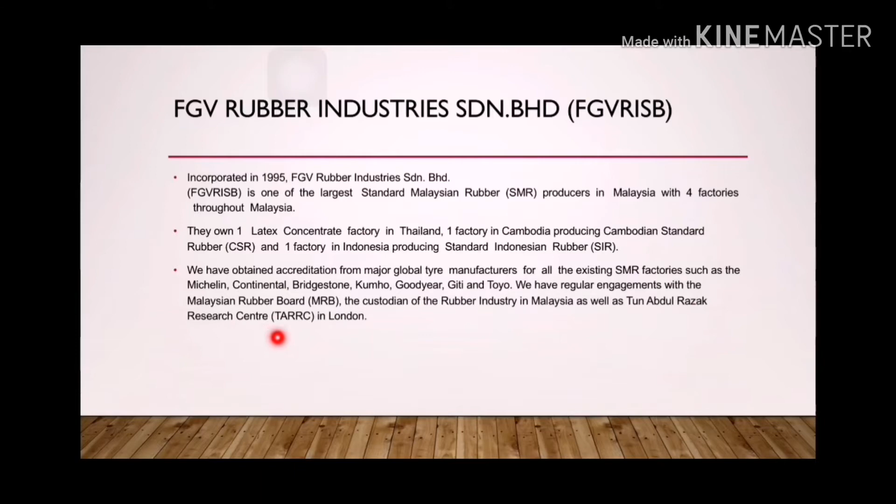Assalamualaikum, and today I will discuss the process involved for SMR10. There are 5 processes that involve making SMR10. The first one is raw materials, the second one is processing, the third one is drying, the fourth is baling, and the last one is packing.

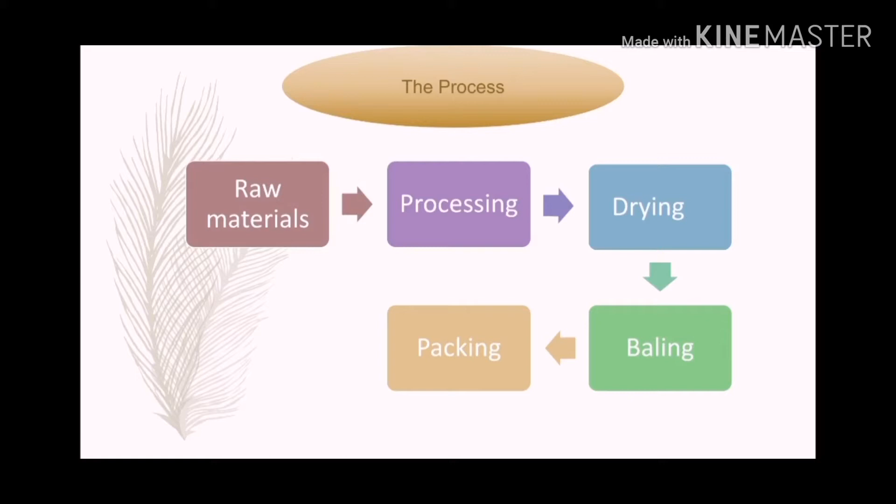For the raw materials used in this process, mainly used are cup lumps and unsmoked rubber sheet. There are two raw materials that are mainly used for this process.

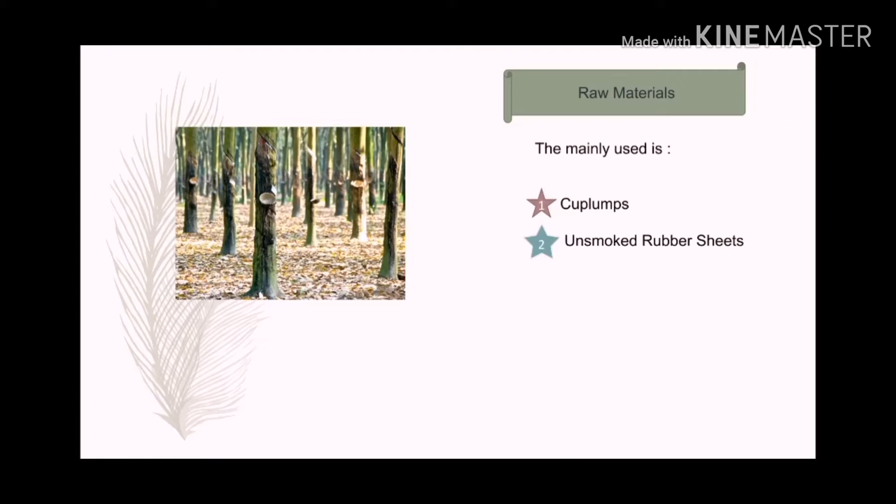For the processing process, they are separated into three stages, where the first one is pre-cleaning, the second one is creping, and the last one is final size reduction.

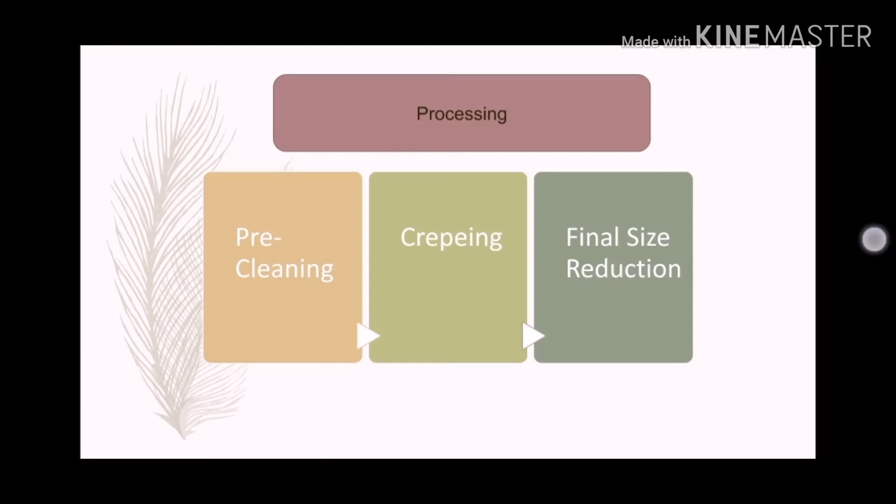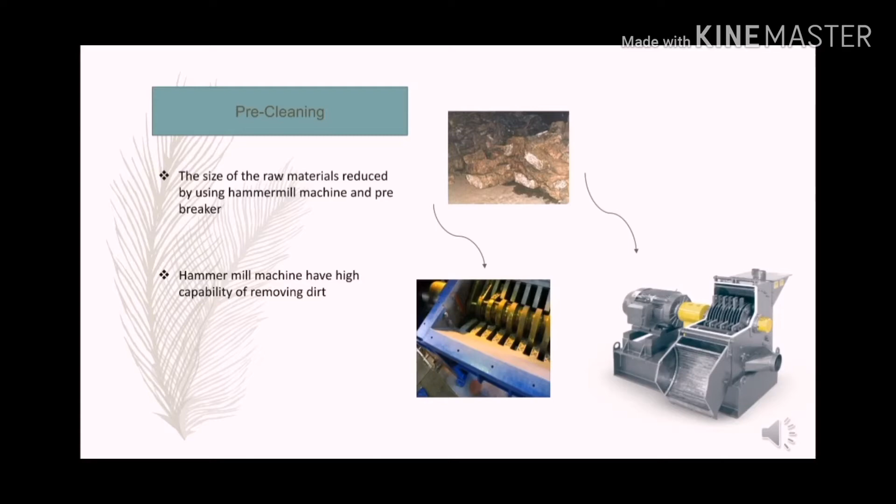The pre-cleaning process uses a hammer mill machine and pre-breaker. Why do we use this machine? Because it can reduce the size of the raw materials, and the hammer mill machine also has high capability of removing dirt, so it can remove dirt from the raw materials.

For the second stage, the machine that we use for this process is the macerator. Why do we use this machine? Because it can reduce the thickness of the raw materials, and the other function of this machine is flattening, thinning and cleaning, and the raw materials can be turned into creping pieces after flattening.

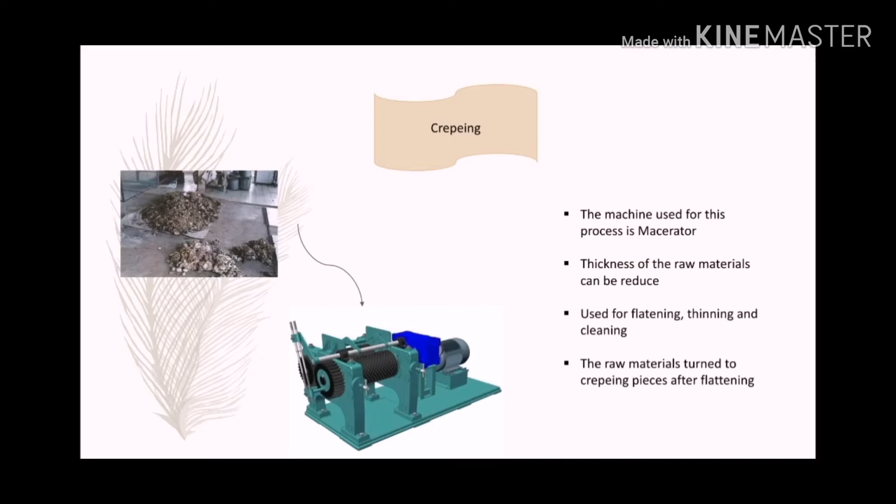For the final stage, there is final size reduction. We use a machine called the shredder for this process. Why do we use this machine? Because it can reduce the size of the material.

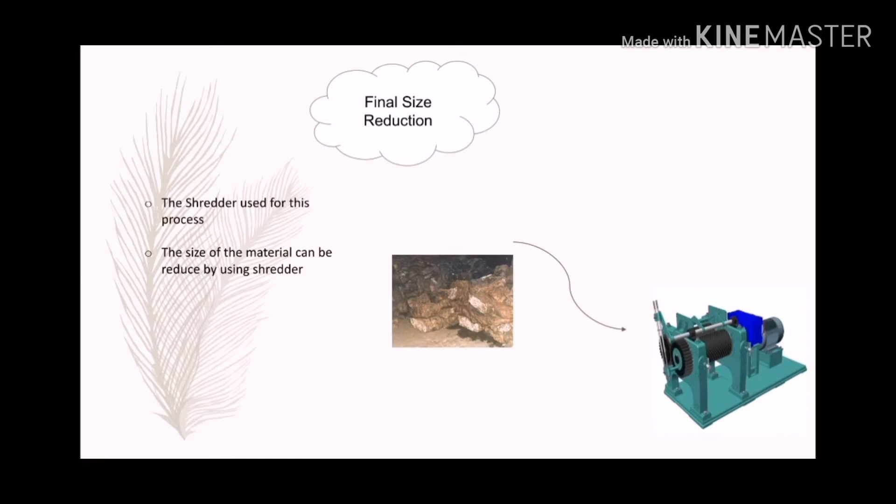After we finish the processing process, the raw material will go through the drying process. In this process, water from the raw material is removed. We use an intermediate temperature between 40 Celsius to 60 Celsius, and this process continues for 4 to 6 days. The raw material is dried in open air or a smoke house, and we can also get a shorter period of time for this drying process by drying the raw material at 90 Celsius to 100 Celsius, up to 130 Celsius, under air circulation.

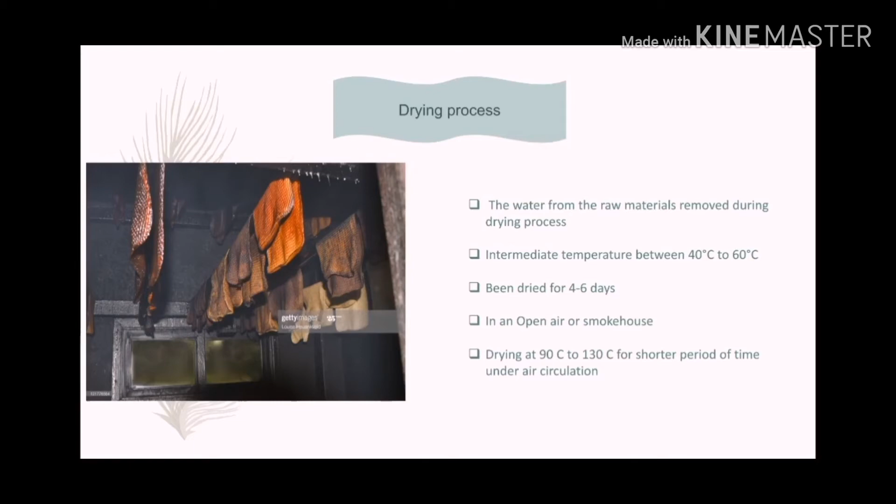After the drying process, we go to the baling process. In this process, the raw materials are cooled by the cooling facilities attached to the dryers, and these raw materials are cooled under 50 degrees Celsius. After that, the raw materials are pressed under hydraulic presses that have 100 metric ton capacity.

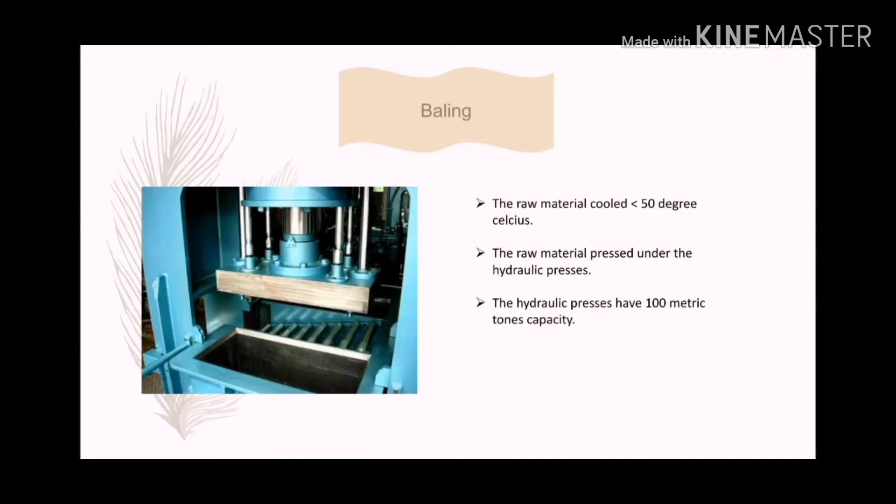For the packing process, the last process: technically, standard natural rubber, or TSR, is packed individually, separately in polythene plastic, and organized on pallets. Wooden crates or steel crates are also used for packing this TSR. Thank you.

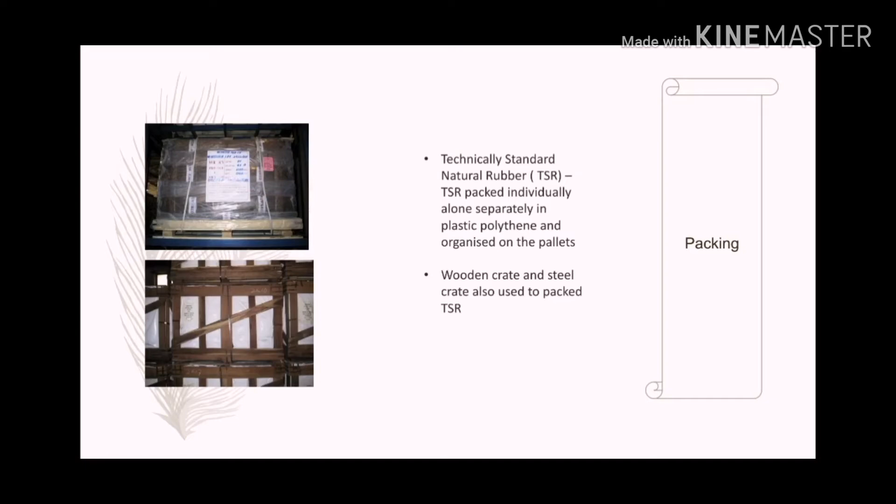Alright, we move to the next slide, which is current development. During the long journey in rubber production, international markets are always looking for new developments in rubber processing to produce high quality products.

Due to waste problems from rubber industries worldwide, markets always demand eco-friendly rubbers. To make sure the company stays on track, FGV always works with their researchers to invent new quality rubber, and they are also the sole producer of quality rubber products in Malaysia. Their products are well accepted worldwide.

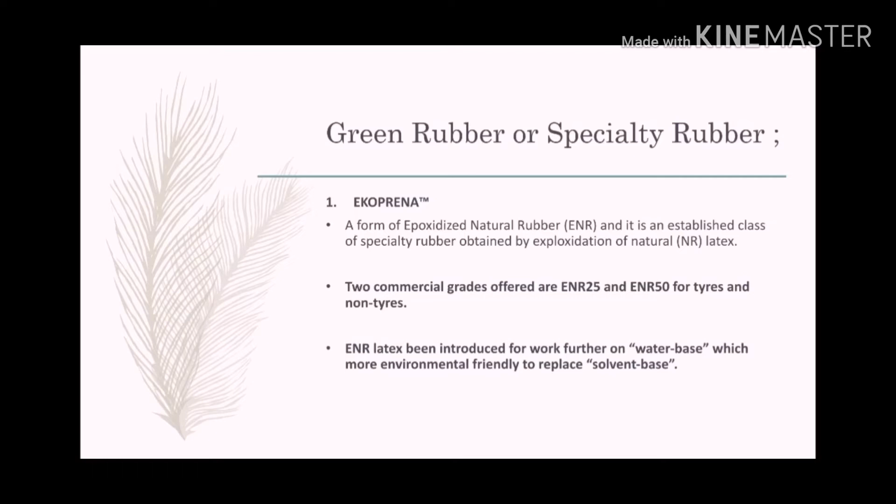FGVRISB proudly produced a new invention in the rubber industry, which is green rubber or specialty rubber, the first being Ekoprena. Ekoprena is a form of epoxidized natural rubber (ENR), an established class of specialty rubber obtained by epoxidation of natural NR latex. Two commercial grades offered are ENR25 and ENR50, for tires and non-tires. ENR latex is being introduced further on a water base, which is more environmentally friendly, to replace the solvent base.

Second is Pureprena. Pureprena is a new generation of deproteinized natural rubber (DPNR), produced by treating fresh natural latex with an industrial enzyme which hydrolyzes all naturally occurring proteins in the latex into water-soluble forms.

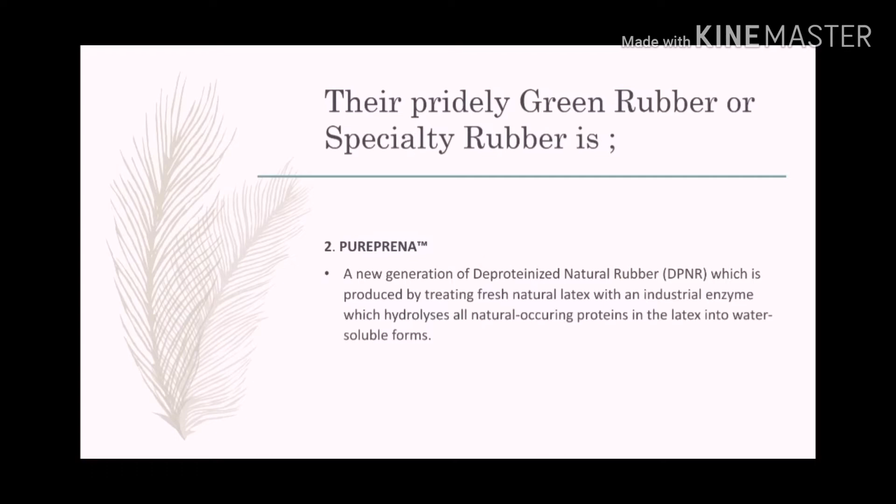FGVRISB has been awarded exclusive rights by the Malaysian Rubber Board (MRB) to produce green rubber under the brand names Ekoprena and Pureprena. Commercial production of Ekoprena and Pureprena at their Palong 8 factory commenced at the end of 2012.

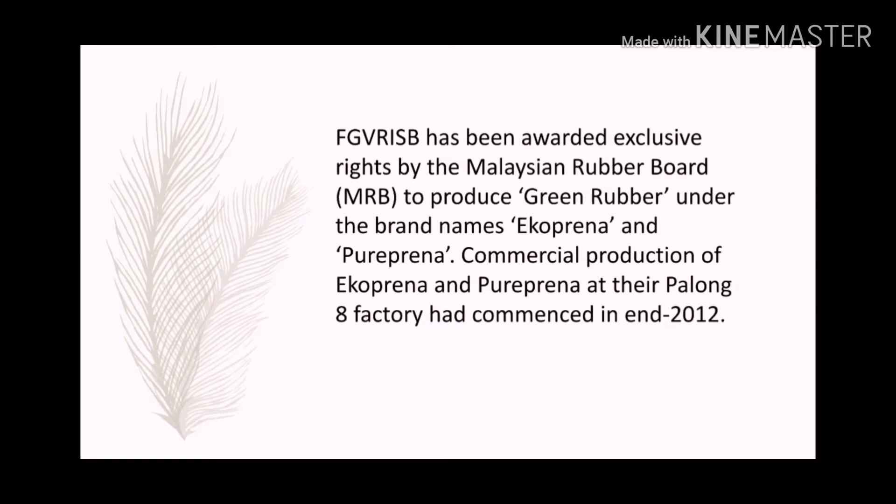Hello, today I will explain about materials that are commonly used. First, field-grade rubber, which autocoagulates. Field-grade rubbers are those that have autocoagulated in the field. Field-grade rubbers may be divided into four groups.

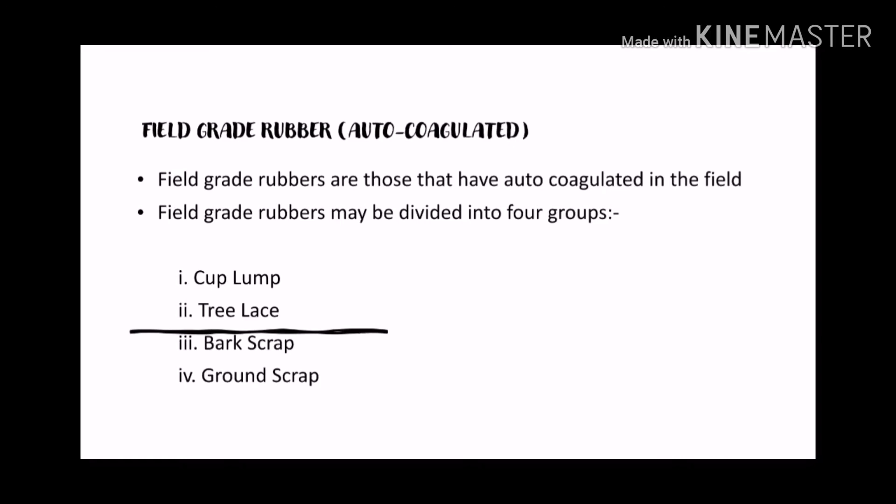That is, Cup Lump, Tree Lace, Bark Scrap, and Ground Scrap. First, Cup Lump. Cup Lump is the coagulated material found in the collection cup when the tapper returns to tap the tree again. It arises from latex clinging to the walls of the cup after the latex was last poured into the bucket, and from that dripping latex drying before the latex carrying vessels of the tree become blocked. Cup Lump is the rubber derived from the after-dripping of latex left in the cup following latex collection.

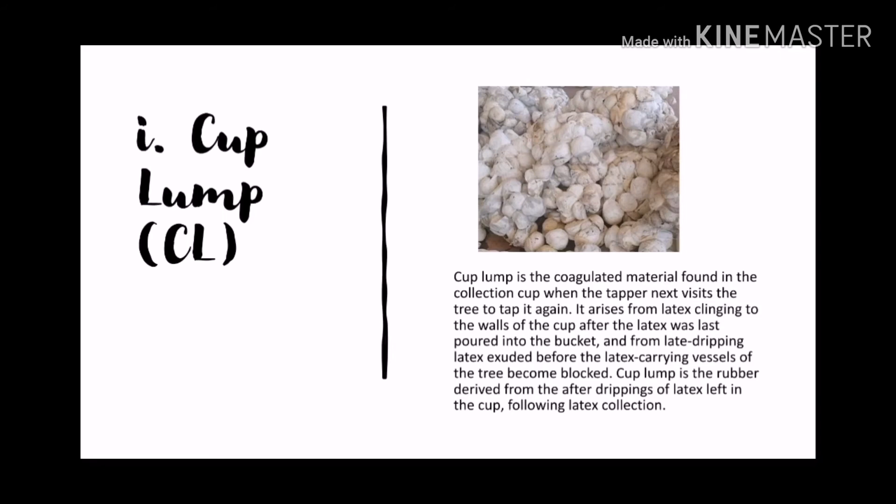For the second group, tree lace. Tree lace is the thin strip of rubber derived from the last drops of latex flowing from the tapping cut and down groove and spout. It is contaminated with iron and manganese ions absorbed from the bark of the tree, and often contains bark chippings.

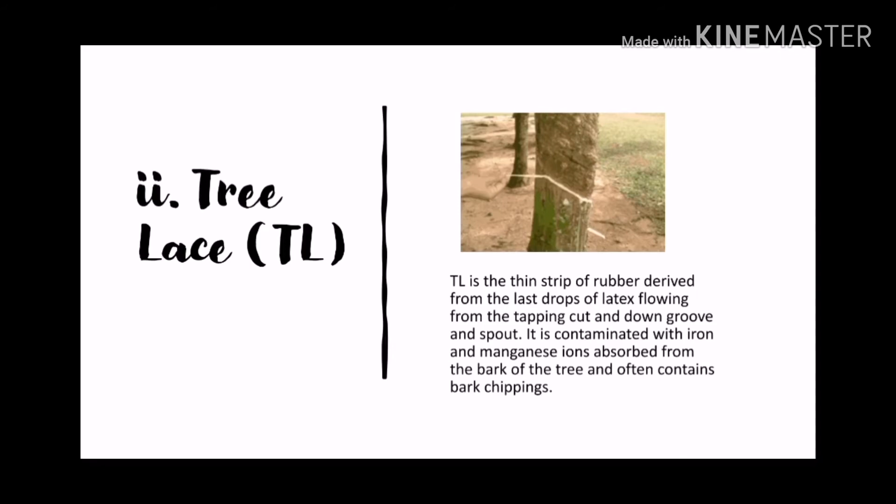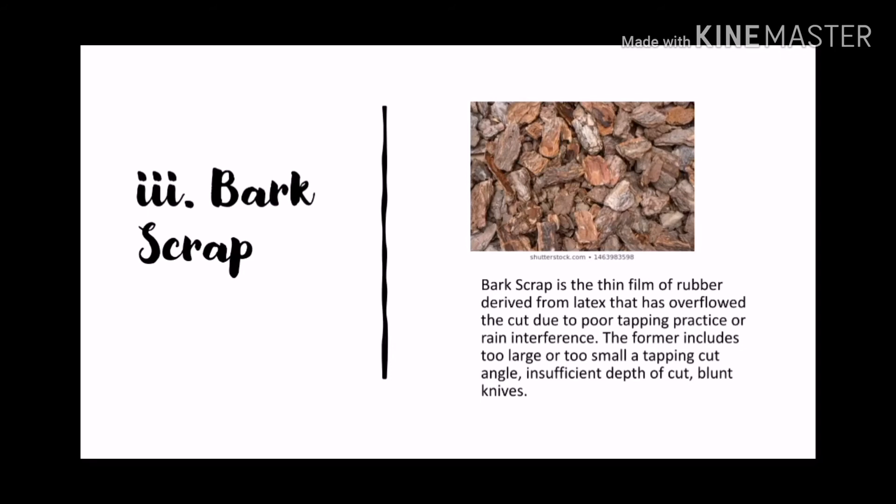For the third group, bark scrap is the thin film of rubber derived from latex that has overflowed the cut due to poor tapping practice or rain interference. This includes too large or too small a tapping cut angle, insufficient depth of cut, or a blunt knife.

Last but not least, the fourth group is ground scrap. Ground scrap is rubber derived from latex that has overflowed the cup due to bad tapping practice, inefficient field management, and rain interference. Ground scrap is contaminated with leaf, earth, and twigs, and is rarely encountered.

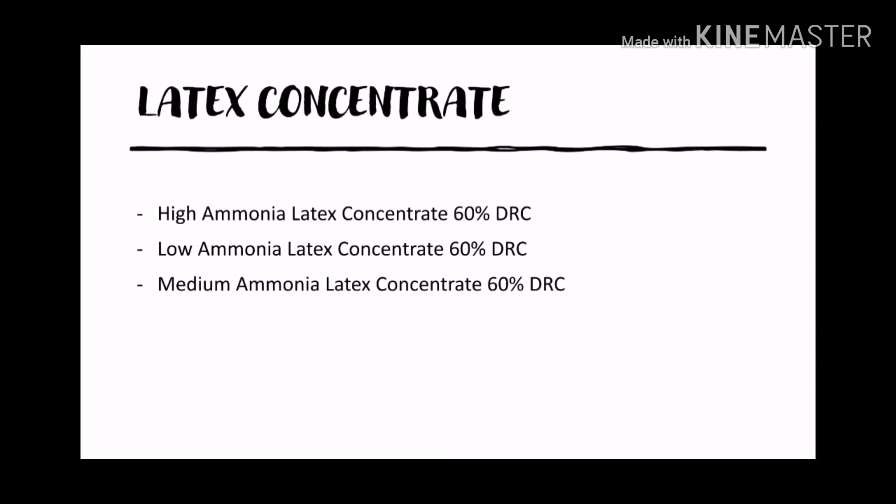For latex concentrate, there is high ammonia latex concentrate 60% DRC, low ammonia latex concentrate 60% DRC, and lastly, medium ammonia latex concentrate 60% DRC.

Next, raw material. The composition of latex sap consists of 30 to 40% rubber particles, 55 to 65% water, and small amounts of protein, sterol glycoside, resins, ash, and sugars. Rubber has high elasticity and a polymer molecular structure.

This structure consists of a long chain made up of tens of thousands of smaller units, called monomers, strung together. Each monomer unit has a molecular size comparable to that of a simple substance such as sugar. Other special chemicals are used as preservatives or stimulants during the harvesting process.

Both synthetic and natural rubber production require the use of vulcanizing chemicals, primarily sulfur. Fillers such as carbon black are also added to provide extra strength and stiffness. Oil is often used to help processing and reduce cost.

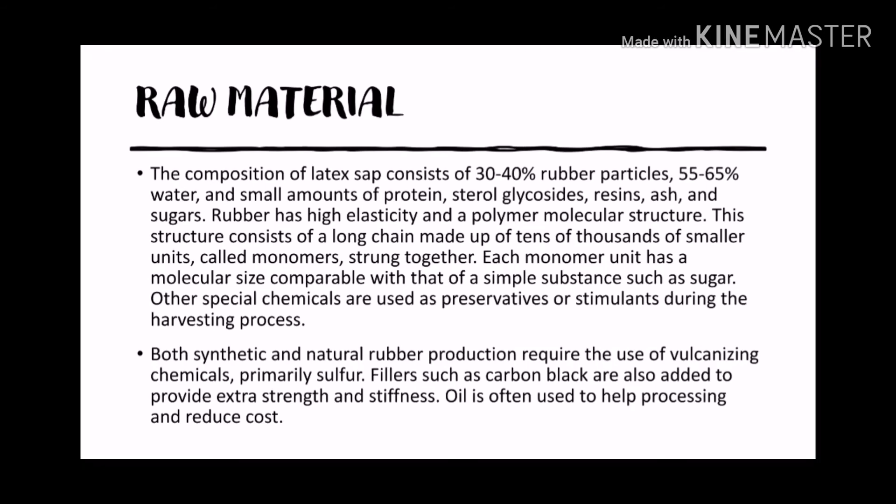Okay, now we move to the types of SMR produced by FGV Holdings. There are 4 types of SMR produced by FGV Holdings, which are SMR 10, SMR 20, SMR 10 CV, and SMR 20 CV.

Okay, now we move to the flow diagram of SMR 10 and SMR 20 production. There are 2 types of materials: clean materials and dirty materials. First, we go through the clean materials.

First, the granulator needs to proceed to extruder, then dryer, and lastly press or packing. Secondly, the dirty materials need to proceed to granulator or creeper hammer mill, then move to granulator, then extruder, then dryer, and lastly press or packing.

And creeper several passes down, go to creeper or hammer mill shredder, and go to dryer, and lastly press or packing. And chemical treatment needs to go down through the dryer, and lastly press or packing.

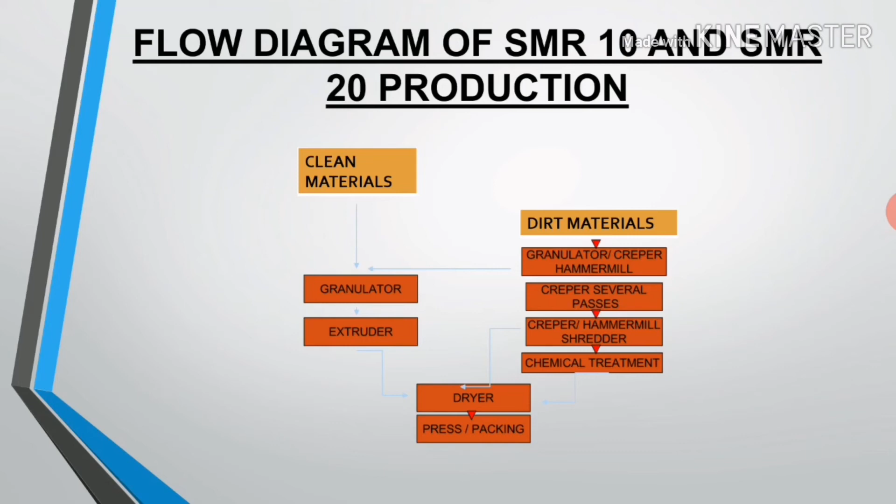Okay, now we move to phase. There are 3 phases in SMR 10 and SMR 20: pre-cleaning, creping, and final reduction.

First, pre-cleaning. Pre-cleaning is carried out by macerator, granulator, or hammer mill. This can expose new surfaces which facilitate the dirt removal. The function of granulator is that it's more quiet to operate than hammer mill.

The hammer mill brings little size reduction but surface cleaning. Lastly, a limitation of hammer mill is that it's not suitable for large proportion of tree laces because it will wind around the hammers and jam it.

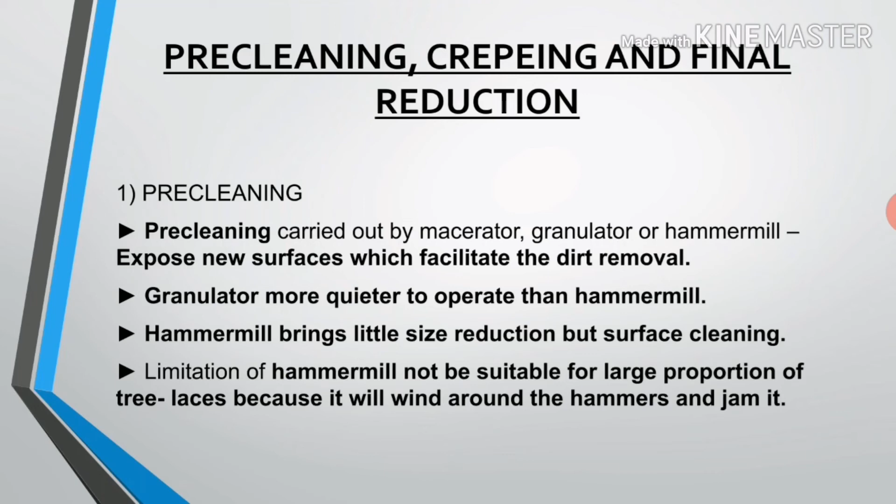Secondly, we have creping. The pre-cleaned materials crepe into a blanket. It depends on the type of raw materials and the grade of SMR required. A well-performed blanket, well-shredded and blended, can pose less problems in drying.

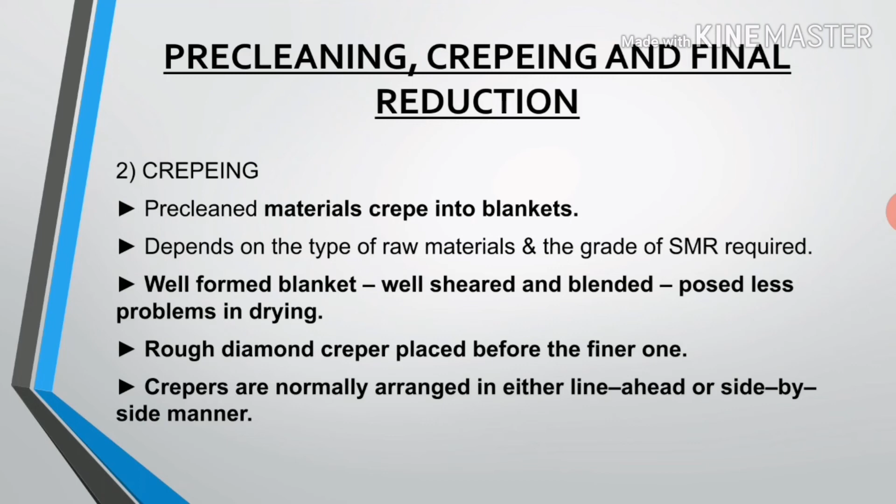Rough diamond creper is placed before the finer one. Crepers are normally arranged in either line-ahead or side-by-side manner. Lastly, we have final reduction.

Final reduction: shredded crumbs which had accumulated in the tanks tend to agglomerate themselves. This results in a wet centers problem in the dry rubber biscuits.

It is highly recommended that castor oil be used whenever the shredder is used as the final size reduction machine. Another inherent problem in the use of shredder is that it requires frequent sharpening of the cutting edges. The blunt edges reduce cutting efficiency.

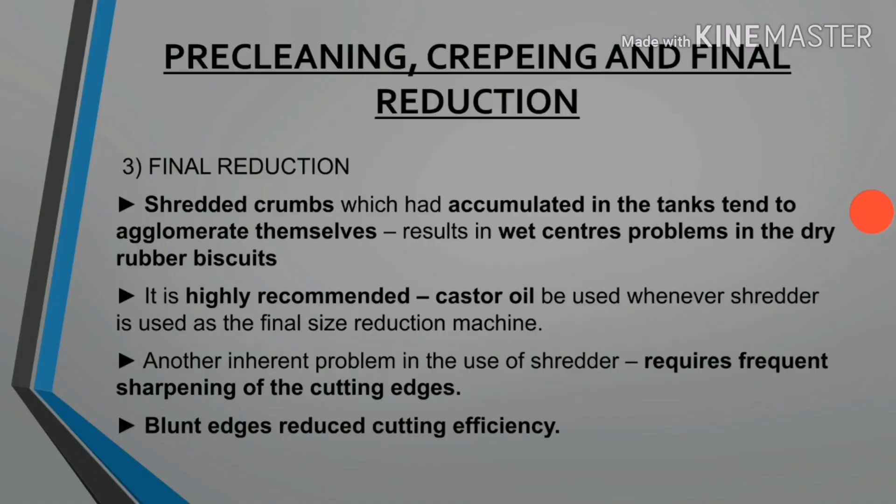Okay, then we move to blending technique. There are 5 main aims to obtain a high degree of consistency in the production of SMR 10 and SMR 20.

First, during reception, raw materials from different consignments are discharged into several reception tanks as evenly as possible. Each tank has materials of different consignment.

Second, the materials from different storage tanks are fed into the pre-treatment machine simultaneously. Third, the use of blending tank in the pre-treatment stage.

Fourth, crepes are blended by folding and overlapping passes during crepeing. And lastly, number 5, the drying trolley compartments are filled up with wet crumbs simultaneously.

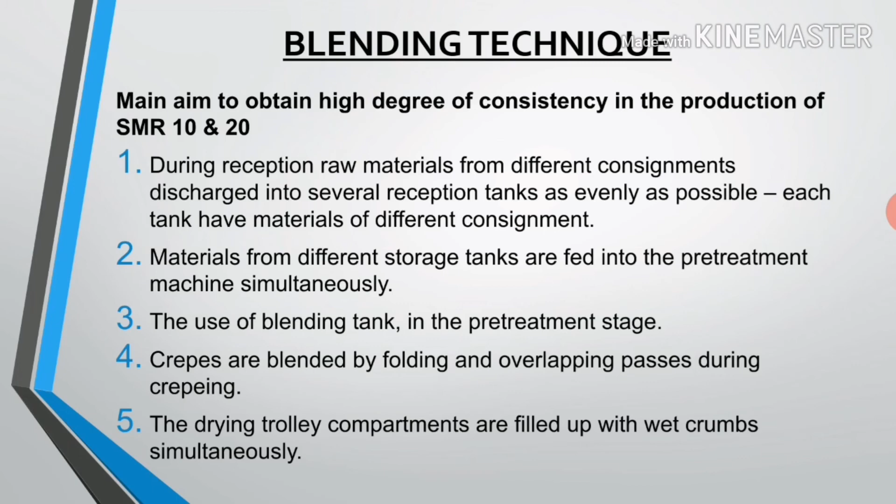And lastly, chemical treatment. At times, due to poor quality of the raw materials processed, chemical treatment is necessary to boost up the PRI properties of the materials.

The most widely used treatment for the PRI problem is to soak wet crumb in 0.5% to 1.0% phosphoric acid solution before they are loaded into the drying trolleys. That's all. Thank you.